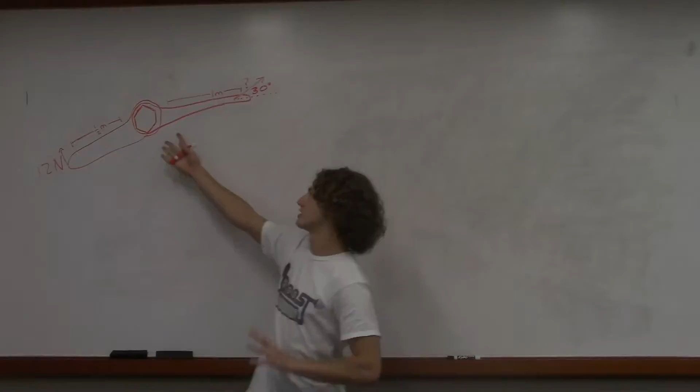Okay, so for this problem, you're playing a game against your friend, and there's this nut in the wall, and the goal is both of you have a wrench, and you're trying to twist it, and whoever gets to twist the wrench in the direction that they're pushing wins the game.

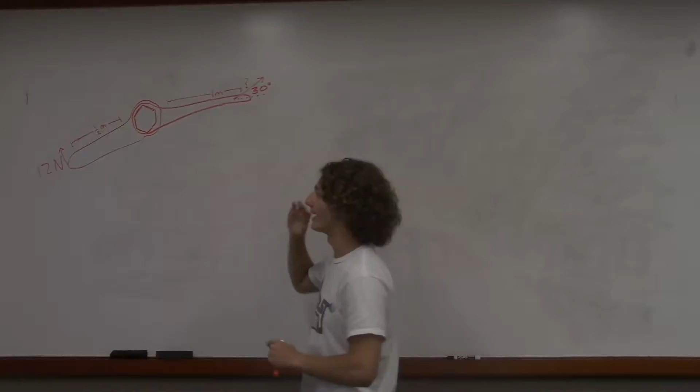So the goal is going to be to figure out how much force we need to exert on our wrench to at least equal the amount of torque that your friend is exerting or causing on the nut.

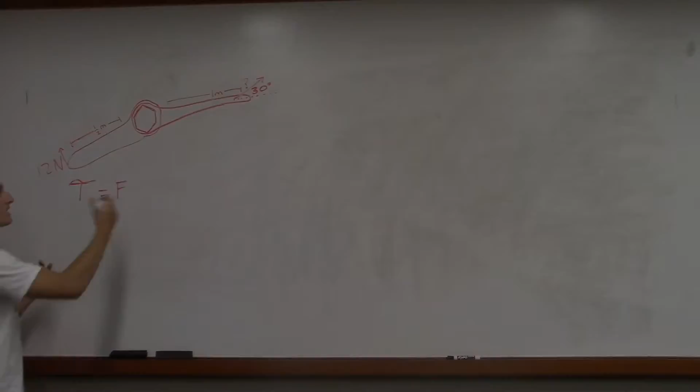And so based on that, we know that torque is equal to just a force multiplied by the distance that it's being acted upon, based on how far it is from the axis of rotation. So we'll just call that R.

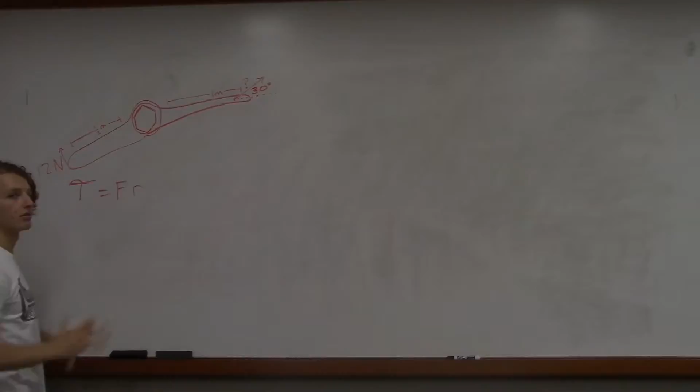So for this, we're just going to break down the left and right side of this game. And based on that, we'll be able to figure out how much force you need to exert to at least equal the amount of torque that your friend is causing.

So if we do sum of torques on the left side, I'll just put that L to denote the left side, that must be equal to the sum of torques on the right side. And this is, as I said earlier, because to win the game, we need to at least match the amount of torque that is being caused by the other party.

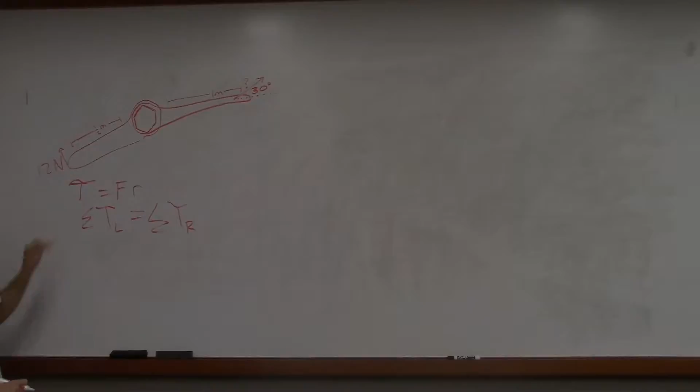So from here we can use the first equation and plug in for each of these two variables. So on the left side we just have your friend's wrench, and we'll notice that the force we're given is 12 newtons, so we can just say 12 newtons multiplied by a radius of 1/2 meters.

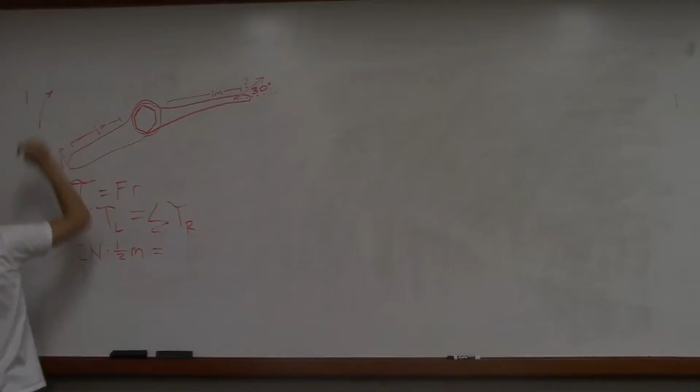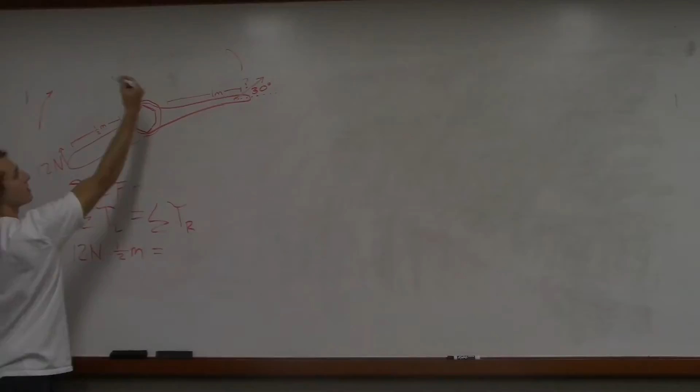Okay, and that's everything over here, right? So these forces are acting in this direction, right? And those are the only forces acting to rotate it this way. And your forces, your team in a sense, are trying to rotate it this way. So this is all that's going for this direction.

Now we're going to flip directions. For your wrench, you have a different wrench that's 1 meter long, so you actually have twice the amount of leverage, as they say.

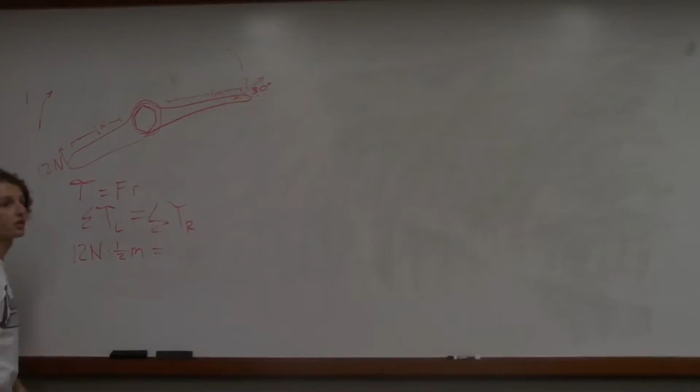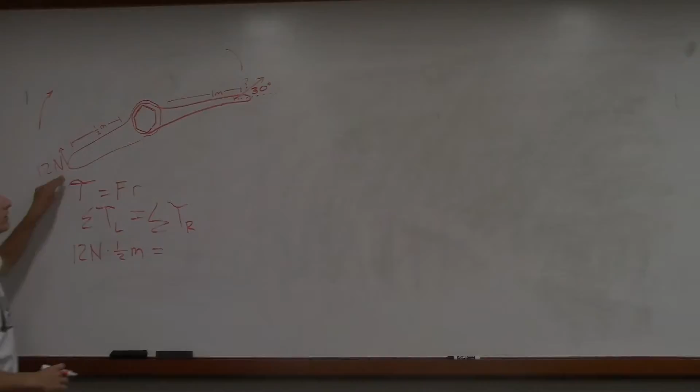So in this case, the force is something that we don't know. And that's going to be something that we need to pay attention to, because right here, if you'll notice, this is a little arrow representing your force. So the force that you're exerting isn't exactly perpendicular like your friend's is. So we need to actually figure out what component of this force is actually contributing to the rotation.

Because if we break this down into two components, we'll just call this F. We have two components here. So we have what we'll call Fx and what we'll call Fy. And in this case, Fy is going to be the only one contributing to the rotation.

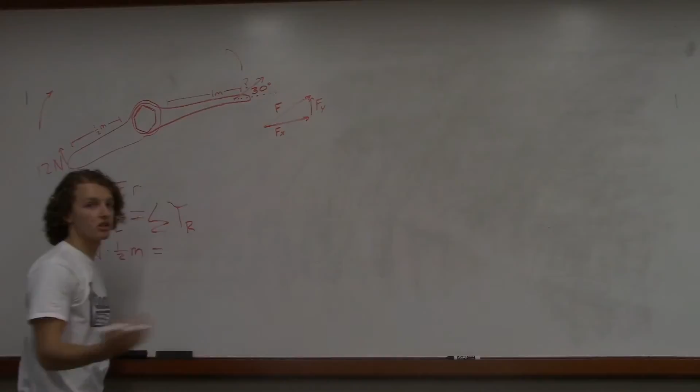Because if you think about it, you have a wrench hooked up to a nut. All this Fx is you're pulling along the wrench, right? All that does is, it's nothing. It's just pulling against the nut. It's not going to cause it to rotate. So what we're really looking for is this Fy as a part of this torque.

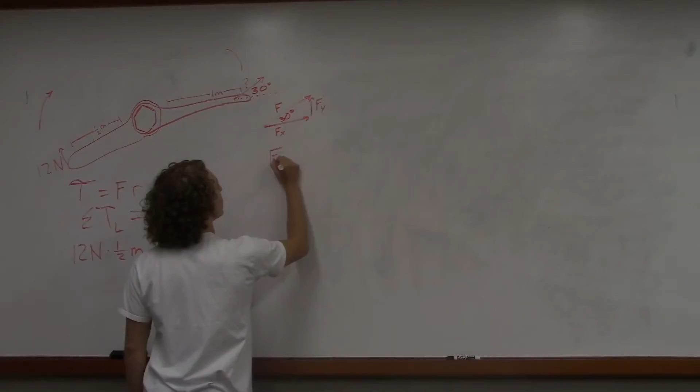And Fy we know just from trigonometry. If this angle is 30 degrees, we can say that Fy is equal to F sine 30.

And so now we're going to use this relationship and plug into here. So first we're going to use the force, which is Fy, remember, because that's the component that's contributing to rotation. So F sine 30 degrees. And now we multiply that by a radius, which is 1 meter.

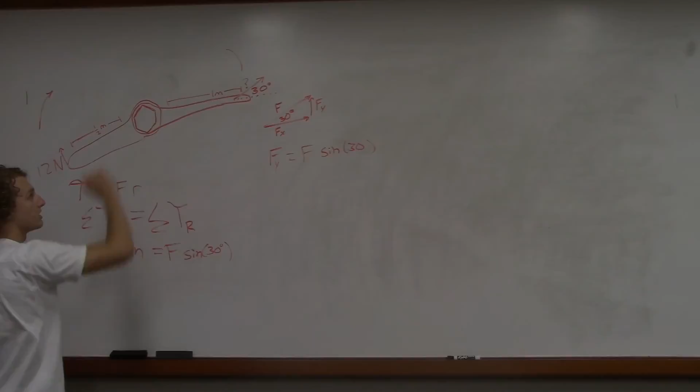Okay, so from here, it's pretty simple. We can cross out the 1 and the meters over here. Solve for the left side, we have 6 newtons, which is equal to F times sine 30, which you can plug into your calculator if you don't know, but it's 1/2. Okay, and then we just solve for F and we get 12 newtons.

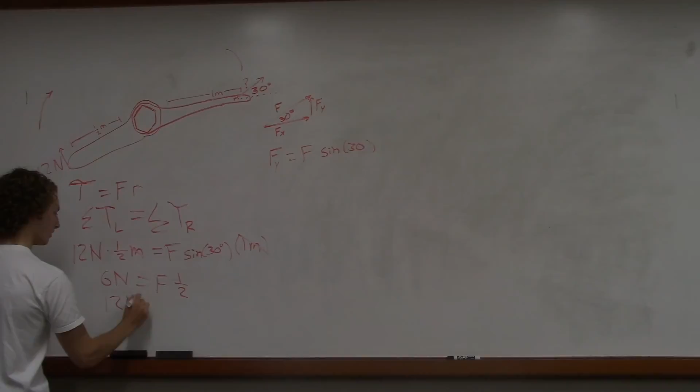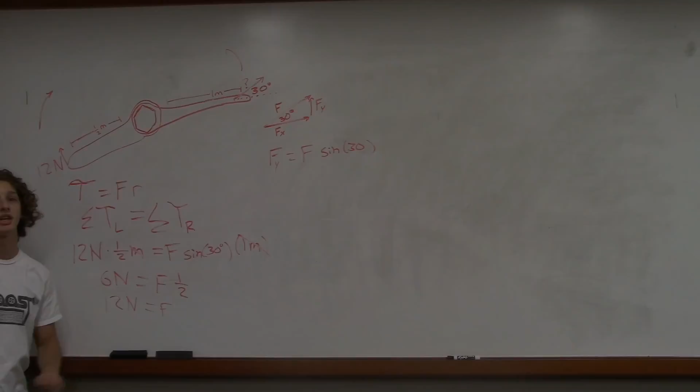So you'll see that even though your wrench is twice as long, because of this angle over here, both of the forces that you're exerting are actually going to be the same, because the increase in leverage, per se, by the wrench cancels out with the decrease in leverage caused by the angle that you have to push at.